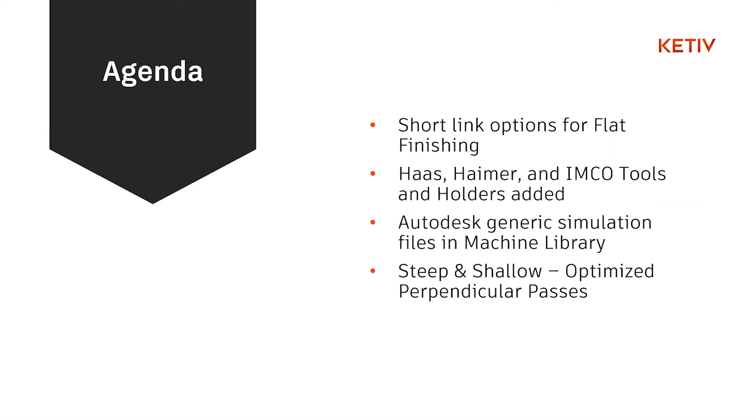Again, it's been optimized. I'll show some of the settings that have been added to that toolpath, so that you guys are aware of how it works. Let's go ahead and jump into that first option.

So we're going to be talking about flat finishing. This toolpath has been incorporated into Fusion 360 since August. It's very similar to the horizontal toolpath, but there are a few differences that bring it up to par. If you guys have been using the horizontal toolpath for some time, one of the biggest issues I've seen happen is...

if you have holes on your parts—let's say you have a flat and then a bore or a through hole—if you use the horizontal toolpath, it's going to pick up that hole and try to machine around it. One way around that is you have to patch that hole up using some sort of surface, but that takes time, especially if you're not used to using the surface command or the surface environment. It can increase your programming time.

The flat finishing toolpath differentiates in that it actually machines over the hole—it ignores that profile and machines as if it was just a smooth flat surface. The other drastic change is that it recognizes open pockets. If you're using the horizontal toolpath, that toolpath doesn't pick up that it's an open pocket—even though it is one, it'll see it as a closed pocket and try to machine starting from the inside, working its way out. Whereas the flat finishing toolpath recognizes that it's an open pocket and starts machining from the outside of the part. Really nice changes.

So let's go ahead and jump into the software and show this. I'll be jumping back and forth between the presentation and the software.

Here we have a part, nothing too crazy—it's a pretty prismatic part, meaning no organic surfaces. If this is your first time inside Fusion 360, this is exactly what you get. I always want to be careful saying that, because in maybe 6 to 8 weeks, things might be a little different, or if you're watching on YouTube, the tool ribbon might have changed a bit. So always keep an eye out for that.

Another thing with Fusion 360 is that you don't really have versions, since it's a cloud-based software. You won't believe how many times customers ask me what version I'm running—we're all on the same version at this point. So keep in mind that everyone using Fusion 360 is essentially on the same version.

So this part, while not really organic, still has a lot of flats and pockets that you can machine. One great strategy I'd take advantage of for this part before flat finishing is the horizontal toolpath, which is a 3D toolpath. One thing to point out is that even though we're not working with an organic surface or part, you can still use 3D toolpaths.

That's one thing that I always like to showcase when we're doing trainings. A lot of people have this misconception that 3D toolpaths are going to be used on surface parts or to do some sort of surfacing. No, you can actually take advantage of the 3D toolpaths to do some pretty prismatic machining.

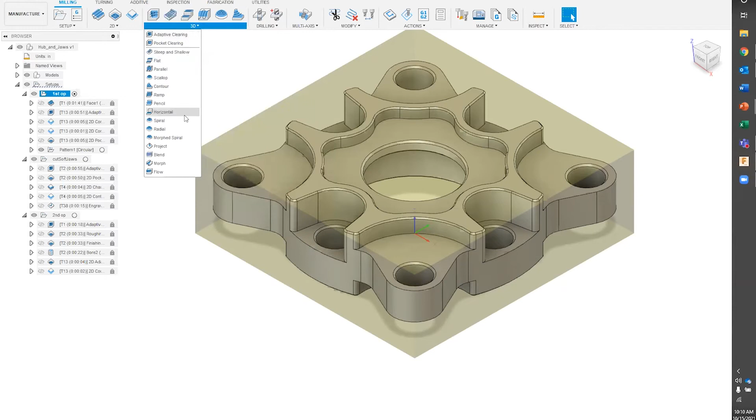So for this one, I'm going to go ahead and select the horizontal toolpath. My previous tool gets selected, right? So nothing has changed here. Everything here is still as I remember it. You still have the 5 tabs there. And I'm not going to change anything inside of this horizontal toolpath. I'm actually just going to leave it as it is, so I'm just going to go ahead and press OK.

And there's the toolpath, right? So it actually does a pretty good job of finding the flats and applying a toolpath. Now it might look a little bit different, and if you guys have been using Fusion 360 for some time now, you're probably wondering, well, where are your lead-ins? Where are the lead links? I don't see any yet.

So again, take advantage of the show hide leads and links option. This does clean your interface up a little bit more. Obviously, before posting out, you probably want to see your links to make sure that you're not crashing into your clamps or maybe some sort of work holding that you have, so I always recommend having that. But as you're trying out some of these toolpaths, sometimes it's nice to just see the cutting passes. What exactly am I going to be cutting? Where is it going to be cutting into? It kind of cleans this up a little bit.

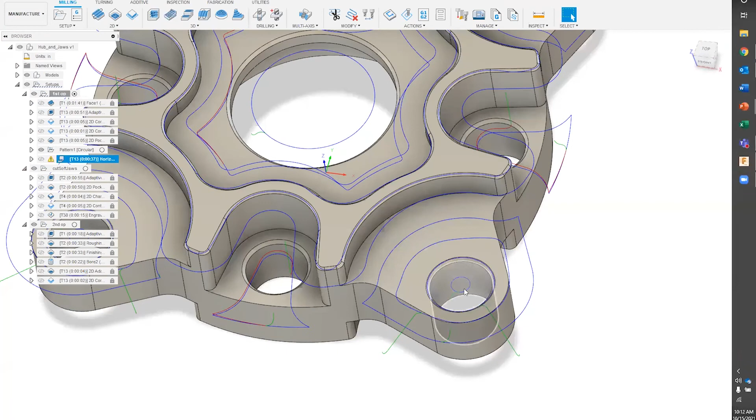But anyways, going back to what I was saying with the horizontal toolpath, you will notice on this specific pocket it picks up that there's a hole here, and it tries to machine around the hole. It does a really nice job of actually finding the contour here and machining to that contour. So obviously that's great, it kind of offsets the passes. But the one thing that I'm not a big fan of is this hole, right? It might give us a kind of weird surface finish. In that case, what you would do is probably go to a 2D pocket or maybe a 2D contour, offset the passes, and get the pass, or the toolpath, that you're really looking for. So that's one of the things that I don't like about this toolpath.

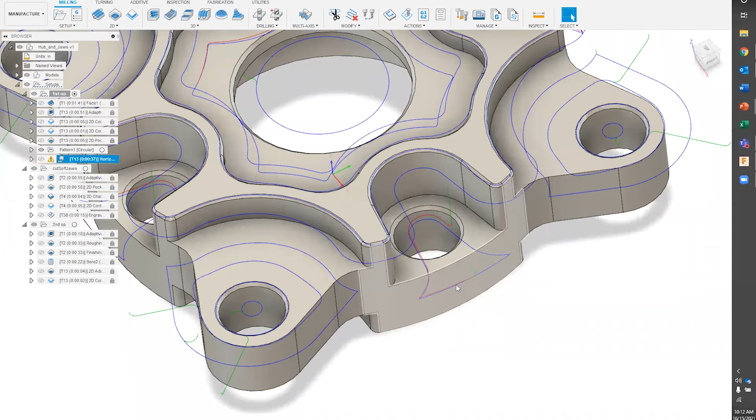The other thing, if you take a look at this pocket now, take a look at where it's starting. It's kind of leading in, or plunging in, ramping in into the center of the pocket, when this whole time it actually can start from the outside and then work its way into the part. So those two things are the big differentiators between the horizontal and the flat toolpath.

So let's go ahead and bring in the flat toolpath. Again, I can go up here to the very top. If I had settings that I made for the horizontal, I would have to make the same settings for the flat. Instead of doing that, always take advantage of the create derived operation. Even as you guys are programming some of your parts and trying to figure out which toolpath is best for some of the geometry that you have, take advantage of this. Make a toolpath, make the changes to that single toolpath, and then try to select another toolpath that you want to test out.

So in this case, I'm going to go ahead and use that flat finishing strategy at the very bottom. A lot of people might try to find it up here at the top, but it's going to be here at the very bottom. Again, not going to make any changes to it, exactly like I did to the horizontal toolpath, and I'm going to go ahead and press OK.

Now here is one thing that I do want to make sure that you guys are aware of. I don't have a stopwatch, but it was a little obvious that the flat toolpath took a little bit longer to generate than the horizontal toolpath, and that's going to be a given. So if you have a larger part, just keep that as a consideration on the back of your mind. The reason for that is that the flat is doing way more calculations.

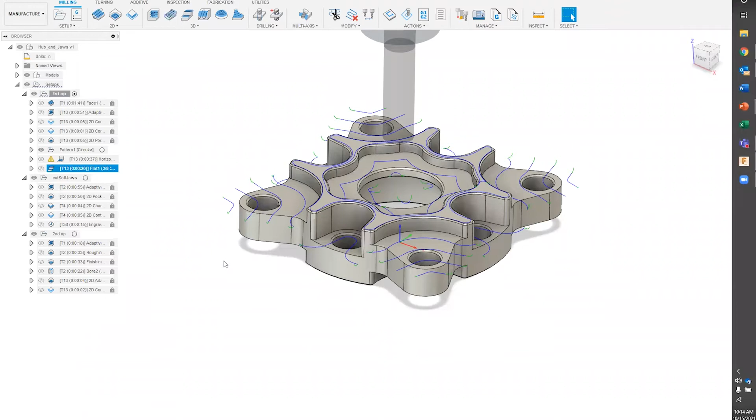So it's actually trying to find the flat surfaces, but apart from that, it's trying to see, does that flat surface have a hole? And then can I machine just a smooth profile over that hole? Is this pocket an open pocket? If it is, can I go ahead and start from the outside of it?

So it has more functionality, and therefore it is going to take a little bit longer to calculate. That's one thing I want to make sure you guys are aware of.

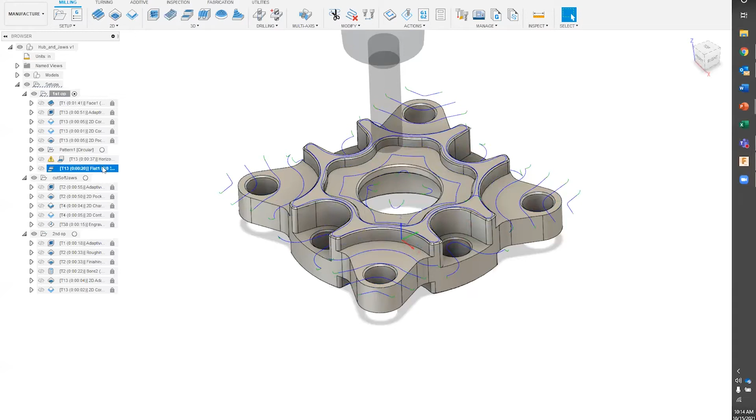But anyways, taking a look at the difference between the two, you can already see a huge improvement. Obviously, we can probably delete this pass, or trim this pass. Maybe we can change the stepover here to get a closer pass to the surface. But nonetheless, right off the bat, without changing any settings, we get a really nice finishing toolpath for some of these open pockets, and even the closed pockets up here at the top.

So again, definitely take advantage of that flat toolpath. To my understanding, it's not something that's in preview, so everyone should have access to that.

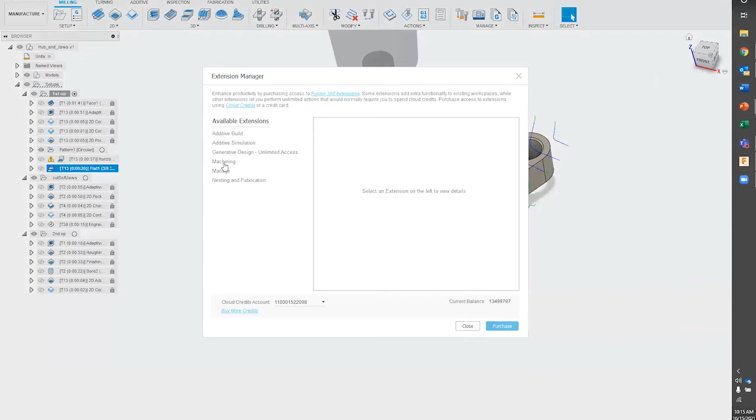You don't need to pay for it. I can double check on that, but taking a look at some of the extensions here in machining, you're not going to see anything on the flat toolpath, unless I missed it. The only one I know for a fact that's part of the extension is going to be that steep and shallow strategy.

So again, this is accessible to everyone. If you guys are using Fusion 360 and are constantly using the horizontal toolpath, go ahead and give the flat toolpath a go there.

So let's go back to the PowerPoint here. Again, improved toolpath efficiency, short link options. So that's actually the update that the flat toolpath got. I was just talking about the flat toolpath.

So the update that this flat toolpath got: if you go to the linking tab, safe distance, maximum stay down distance. This is something that not a lot of customers are really playing too much with, but essentially, if your tool has a lot of retracts,

and maybe it's a pocket, maybe it's a pretty large part, and you know that it doesn't have to retract, or doesn't have to retract all the way up, and it's going to be safe, you can change the safe distance, and you can change the maximum stay down distance.

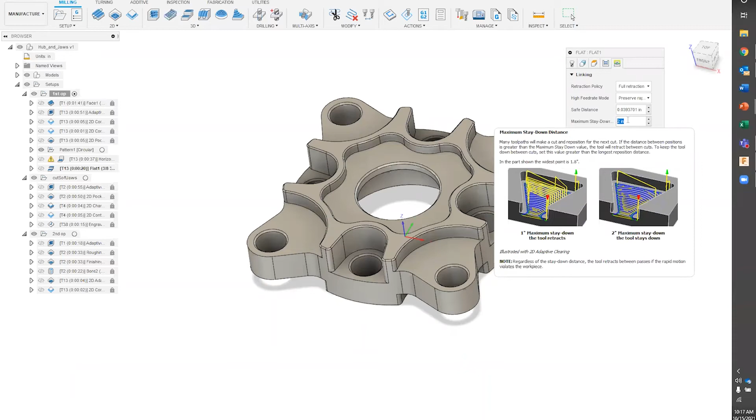A common question I get is, how do I know how large to make that maximum stay down distance? I typically go 2-3 times bigger than the size of the part. So if I have a part that's maybe 5 or 6 inches, I'll go 18 inches as a maximum stay down distance. What that allows the tool to do is, granted, it is going to bump up the calculation time a little bit, but it's going to try to force it to stay down instead of retracting all the way up.

Now, word of caution: when you make that change, you do have to be careful with any sort of fixtures, clamps, or work holding that you have on your part. Because if you don't have them modeled, it's going to have that pretty low retract, and you do run the risk of possibly hitting that clamp, fixture, or work holding. So just be careful with that.

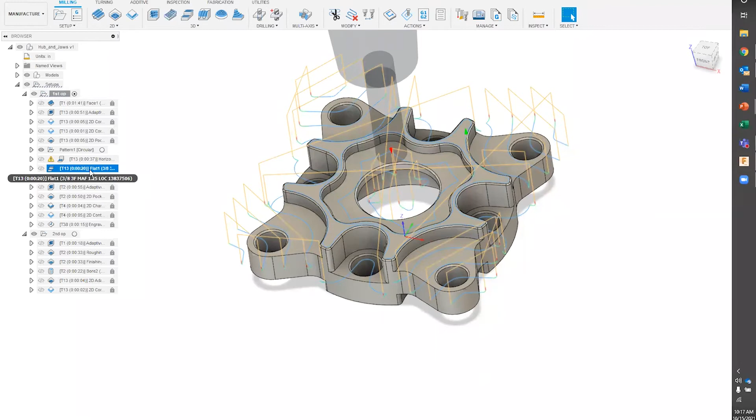And that's where I would recommend turning on your links, so you can see exactly where your tool is going to be going, and then see if you have any possible collisions in there. So that's the update that they made to the flat finishing toolpath. Flat finishing isn't a new toolpath, it came out in August, but the update they made is adding the ability for the safe distance and maximum stay down distance.

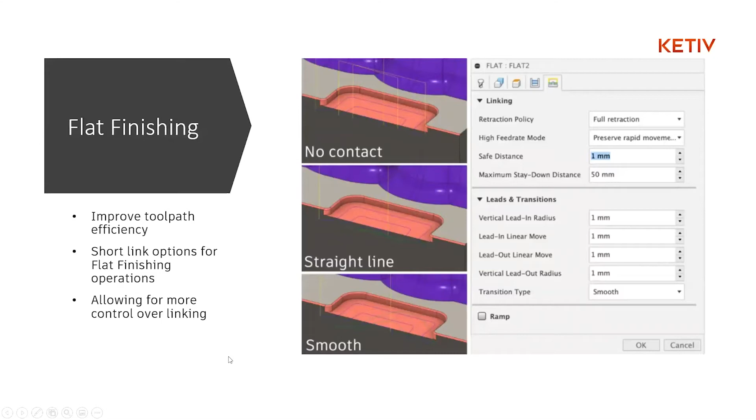So the next update that they made - the tool, they actually made some additions to the tool library and the machine library as well.

So let's go ahead and take a look at this. Again, a lot of people don't take advantage of this, and I can kind of see why. One of the customers was actually sharing with me the reason why they don't like doing this, so let me go ahead and show you why.

So I'm going to go into that library and bring it up here for you guys. If you've ever had to update a post, or look for a post, chances are you're familiar with this website, right?

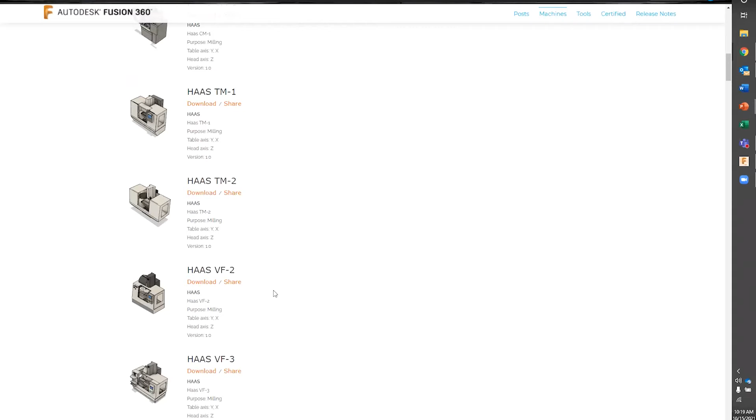For those of you that aren't familiar, this is the website that Autodesk has. It's an open source website, meaning everything in here is free for you guys. So you can go ahead and find a post, download it, and better yet, go to the machines tab, find a machine, and download it. So you have all of these different machines available to you.

For those of you that aren't aware, machine simulation has been out for some time now, but it is still in preview mode. That's one thing I always caution people about: if something is in preview mode, you have to pay a little more attention to the work you're doing, because it's not fully tested and hasn't been completely released yet by Autodesk. So always have your senses a little more heightened when working with preview features.

But I have been testing it these last couple of weeks that I've been back, and it's been working great so far. There are a few things, like I said in the beginning, that you do have to set up before you get machine simulation to work. So let me go through this, and then we'll show you the machine simulation.

Autodesk has been working hard updating this library. If you don't see a library here, you can possibly reach out to them, or you can create your own. There are ways to create your own machine simulation file as well. If you guys need help with that, we can help out, and I'll share my contact info at the end of the webinar. But chances are your machine, or a very similar version, is going to be found inside this list.

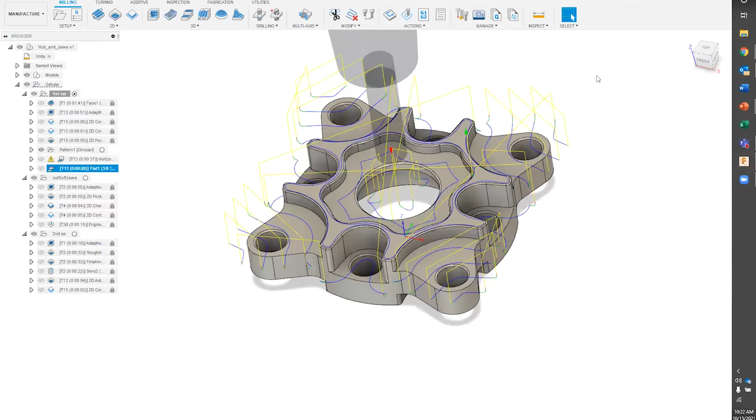Right, and in the manufacturing tab, or the manufacturing environment, under the manage panel, you do have that tool library option. Notice that it's up here at the very top. So again, if you don't see it at the very top and you do want to see it, you do have the option of bringing it up to that toolbar.

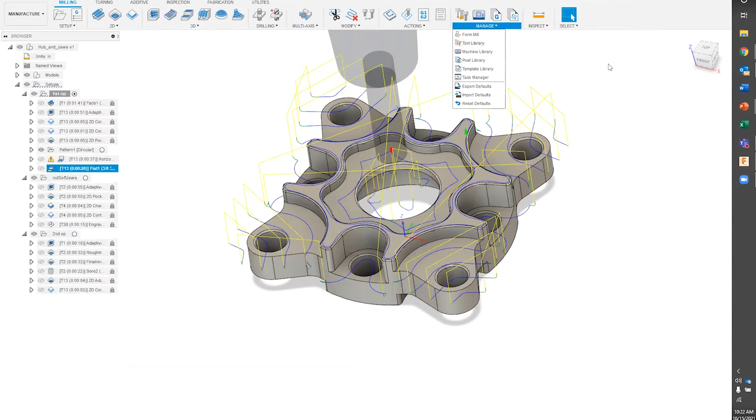Right, so I'm going to go ahead and click on the tool library. This is where obviously your entire tools are going to be residing. So you have the document tools. I'm not going to go into this too deeply because we do have other webinars that kind of cover this. But you have your documents tool, you have your cloud tool library, which I 100% always recommend you have this turned on. And then you have your local tool library.

What I recommend, and this is again, if you guys only have a handful of tools, what I recommend is having that tool library inside of your local tool library. So the one that we just downloaded, finding the tools that you want, and then just adding them to your cloud tool library. Now, a common question I get is, well, why would we do that? It's really just up to you guys. If you find yourselves maybe using different tools from the IMCO tool library, or whatever tool library you have, then go ahead and add them to the cloud tool library. That way you guys just kind of avoid cluttering this up.

Reason why I bring this up is because, again, I like to keep this as clean as possible. So if I'm working with a customer and I'm setting up their tool library, I always like to keep it organized. So based off of machines, maybe based off of different material types that they're going to be cutting, whatever the case may be, just keep that cloud section of the library organized as much as possible. So if you have that IMCO tool library, it can cause confusion. It's just kind of ruins the flow of the cloud section. Some people might see it like that, some people might not. Again, completely up to you guys.

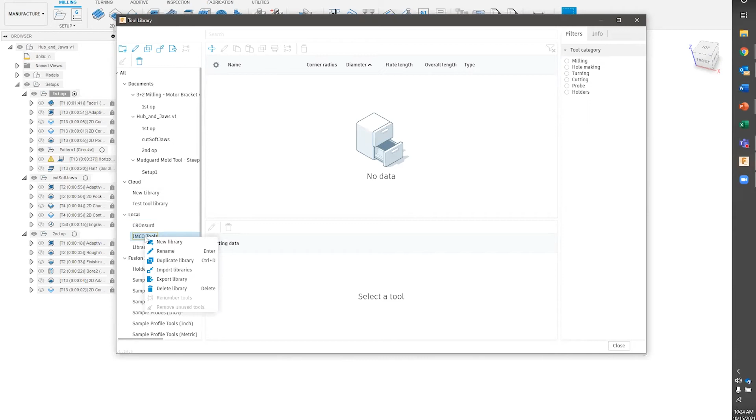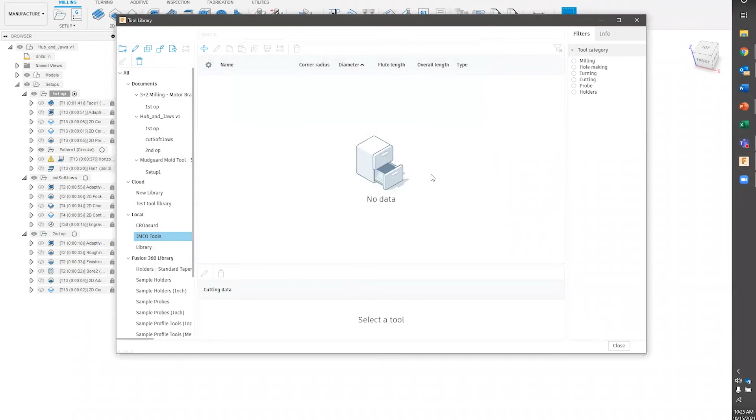But what I sometimes recommend: go into your local tool library, say new library. I'm going to go ahead and call this IMCO tools. And again, we just downloaded that tool library, so I'm going to go ahead and say, go ahead and import libraries. And again, what we're doing there is we're right-clicking on that local tool library and saying import libraries. We're going to go navigate over to our downloads, find that IMCO, say open. And just like that, we have the entire library selected.

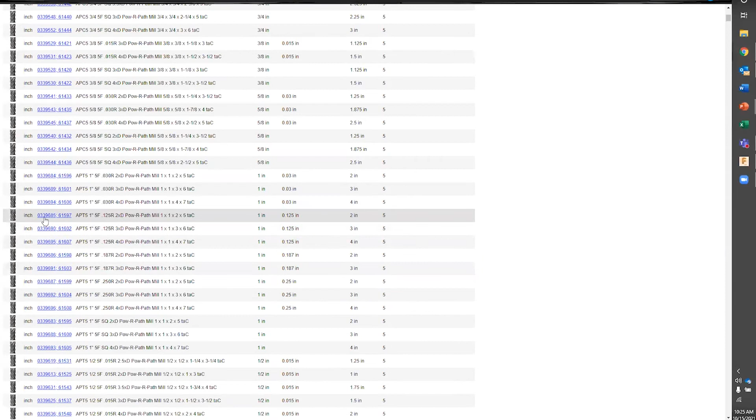Now, here comes the kind of interesting point. So again, you only need 2 or 3 tools. What you can do is you can actually find based off of product ID. So if I go in here into the Imperials and I say view, let me see if I can do this relatively quickly. I'm going to go ahead and see if I can find, let's go ahead and see if we can find this one. So I saw 2 IDs there, might not be the case. Let me do this one. There it is. So it was just that first ID that I needed.

So as long as you know the product ID, if you know maybe the description of it, obviously if you know the tool dimensions, that also helps as well. But if you know the product ID, which chances are, typically you have a list of different IDs, or maybe the different tools with the product ID, you can go ahead and just insert it here. Now what you can do is you can right click, copy tool, and then bring it into your tool library.

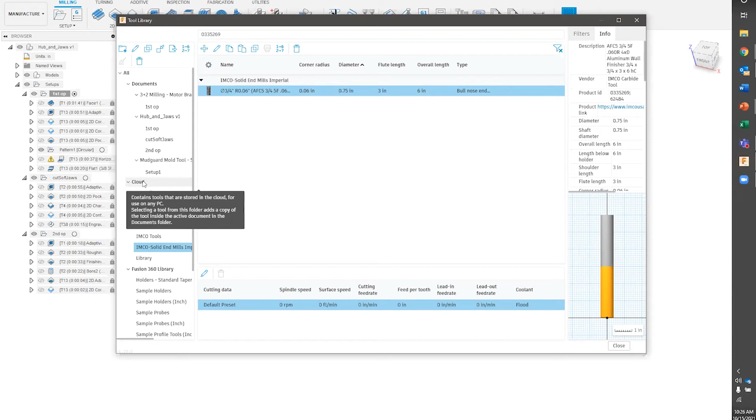Now, again, some people don't have cloud tool libraries. I highly recommend you change that. So why are cloud tool libraries important? If you're working with, let's say you're working at work, for whatever reason, you need to maybe sign into your home computer, you can go ahead and do that. So you're going to have access to all of those tool libraries.

Now, if it was local, this local tool library only lives on my laptop. So that means if I sign in at work and I'm at a desktop at work, I'm not going to have access to any one of these libraries, because these are local to my computer. Now, I can't remember off the top of my head. I thought I read somewhere that this cloud tool library gets enabled by default.

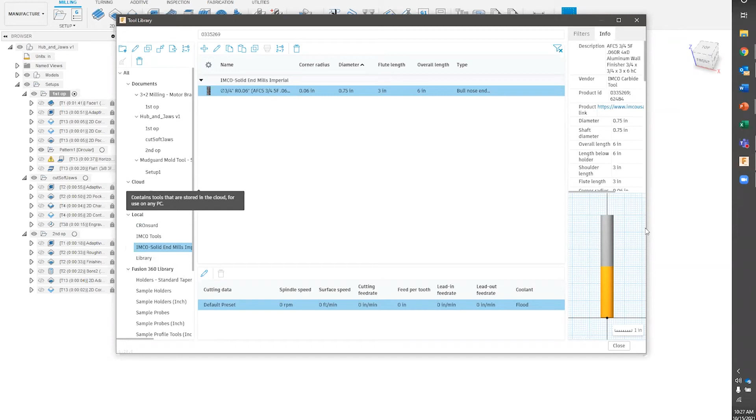I used to know that there was a setting here. So if I go into my preferences, manufacture, enable cloud libraries. So again, I don't know if this gets checked on by default. I know in the past it was something that the user had to check on, but now you have the option to check this on.

So again, if you don't have this checked on, if you don't have cloud libraries, or if you don't see cloud on your tool library, chances are you just don't have this enabled. And this is how you get those out. All right, so that was a quick little spiel on the tool libraries.

Again, they've updated the list. Take a look, it wasn't just tools that they modified, they actually also changed the holders. So they've updated Haas tooling, Haas holders. So this looks like it was one of the ones that they updated. Different tool holders that you can now go ahead and select from.

Really neat functionality. Again, instead of doing it manually or spending maybe an hour, 30 minutes trying to do your holder, just go into the cam.autodesk.com website and see if that holder is available for you guys.

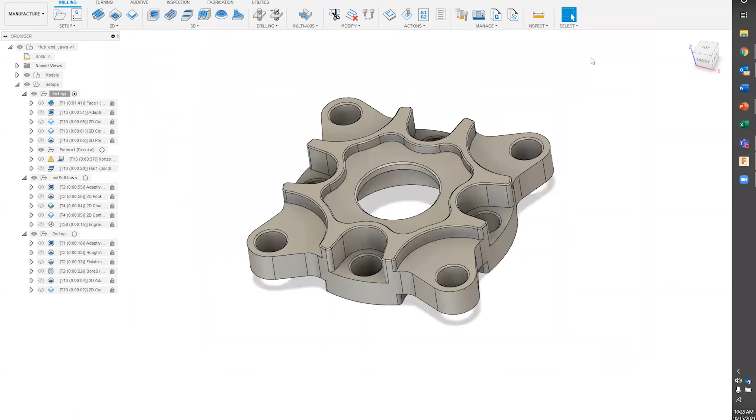All right, so machines. We kind of briefly talked about machines, kind of where they're located. So let's go ahead and show you guys, and I think probably in the future I'll do a full-on presentation or webinar on how do you work with these machine simulations.

So the first thing that I want to go ahead and point out, we have this part open. This part already has toolpaths enabled. I'm going to go ahead and activate that first setup or that first operation.

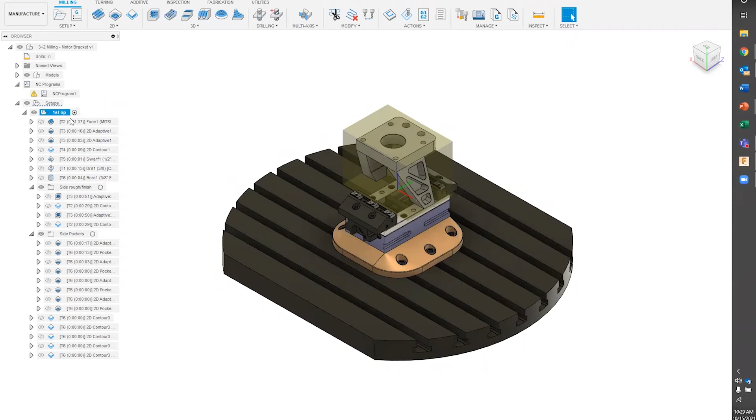Okay, so how do we add the machine simulation files? Now this is an option that everyone should have seen probably for the last year and a half, maybe even 2 years. I know I've seen this option every single time I bring up the setup dialog box. I'm going to right click here, say edit.

And so again, I right clicked on the setup. This very first section is where you start kind of defining the machine configuration and then the machine setup. So again, if you guys have been watching my webinars for a while, I did mention, and I would always mention, that this little section was kind of a way for Autodesk to have the machine simulation capabilities. So this was their first step in kind of setting the path for machine simulation.

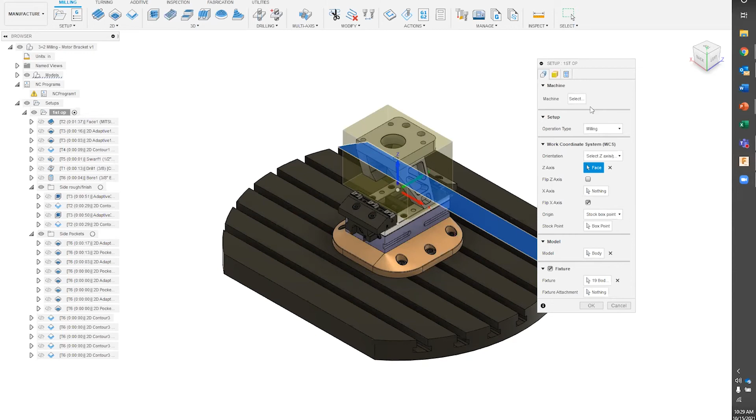So the first step that you would have to do in order to get that machine in is you're going to go ahead and say select, and then you're going to go ahead and look through the Fusion 360 library. So you have recents. If you have a machine inside of this document, you're going to see it in the documents. So very similar to the way that the tool library kind of handles the tools is the way that you're going to see the machines inside of the machine library here.

So I'm going to go into document, my machines. If you have cloud machines, local machines, so on and so forth, you're going to see them here. But if you want to see a list of all the machines, this is where you're going to go ahead and select.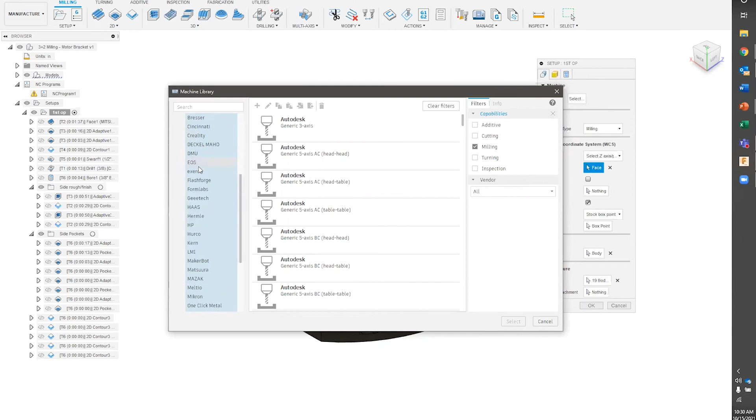So I'm going to go into the Haas. I think this NC program is set up for a UMC 750. So I'm going to go ahead and kind of scroll down, and there's that UMC 750.

Now you will get a little warning sign. So maybe you have a UMC 750, maybe it has different kinematics, you made different changes to it, whatever the case may be. You can only modify machines in your My Machines folder. So in order to do that, you would have to copy this machine and then bring it over to either your cloud library or your local library. You can't modify machines that are inside of this out of the box Fusion 360 library.

So just a word of caution there. Again, if your machine kinematics, if you take a look at this UMC 750, you can see that maybe the axis, maybe the table is different, which might be an option. Maybe the axis limits are a little bit different on my UMC 750. We have additional work holding, we have maybe a different station kind of on the left side. So we changed the limit of the machine. That's where you can go ahead and make a copy of it and then start updating the machine configuration.

Now, what you're seeing here is strictly just machine configurations. You're not going to get a machine simulation out of this. How do I know? If you don't see a little icon on the right-hand side, that means you don't have machine simulation capabilities. This is where a lot of people get confused because they'll go into the machine library, select the machine, and they don't see any options to turn on machine simulation.

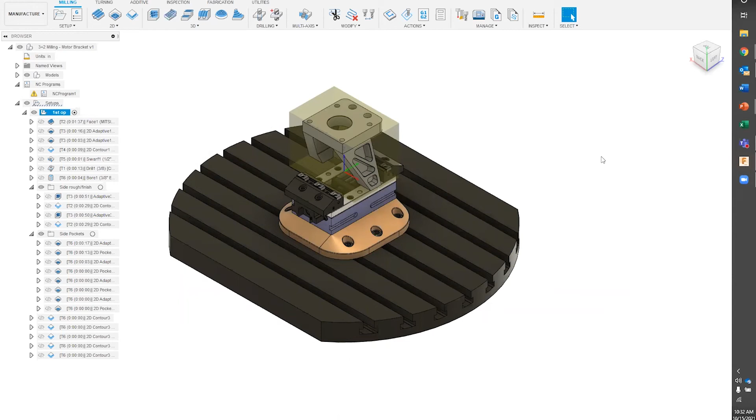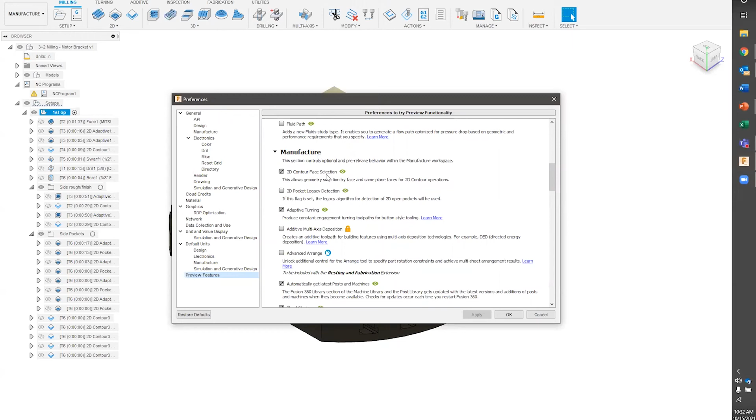The first thing you have to do is go into your preferences, go into preview features, manufacture. This should give you guys an idea - and I don't want to put words in Autodesk's mouth, but in my eyes, take a look at how much preview functionality manufacture has. You can scroll down quite a bit, and all of these checkboxes are things that customers can preview for free inside of Fusion 360. So that should tell you something of where Autodesk is heading with Fusion 360.

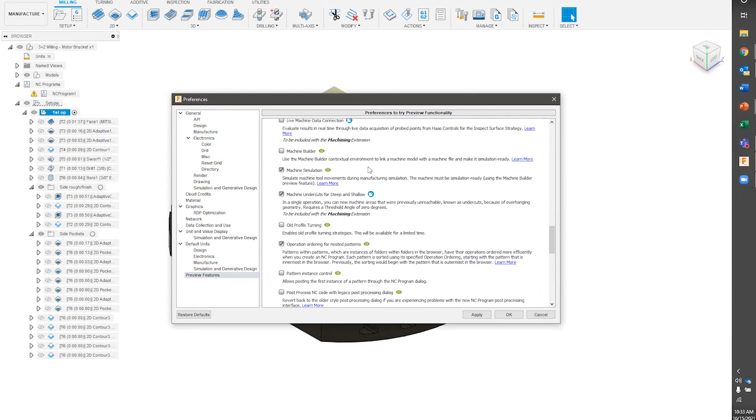The one I'm looking for is machine simulation. It's preview functionality - how do I know it's preview? It's got this little green icon. If it was an extension, something you have to pay for, you'll see a little blue icon instead. So even though it's in preview, you still need to have the machining extension enabled for this functionality to work. Not everything in here is a free preview - some of these are paid.

So machine simulation, machine builder - which to be honest I haven't explored as much yet, so that's something I'll probably give you guys more content on in the future. If maybe you don't see your machine or you want to build your own machine, this might be something to take a look at. But machine simulation is what we're looking for - we're going to apply it, say okay.

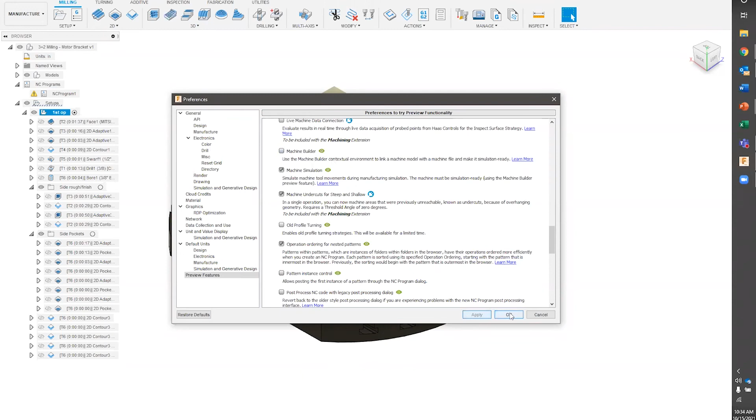Let's go back to that setup. Go into the machine section once again, and now you should see these little icons show up on the right-hand side. What we're looking for is the UMC 750, and now we can see this machine configuration has a machine simulation file or simulation model available.

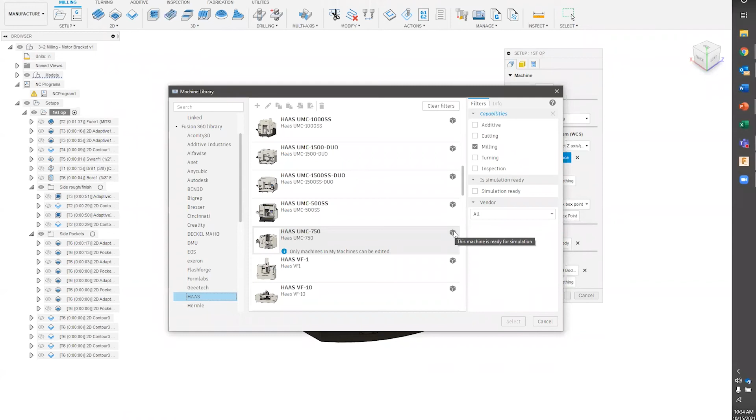I'm going to go ahead and select that one. You can see all the settings here, get a nice little preview of what the machine looks like. I'm going to say select. The model for this machine must be downloaded before it can be used - that's completely fine, I'm going to download the model.

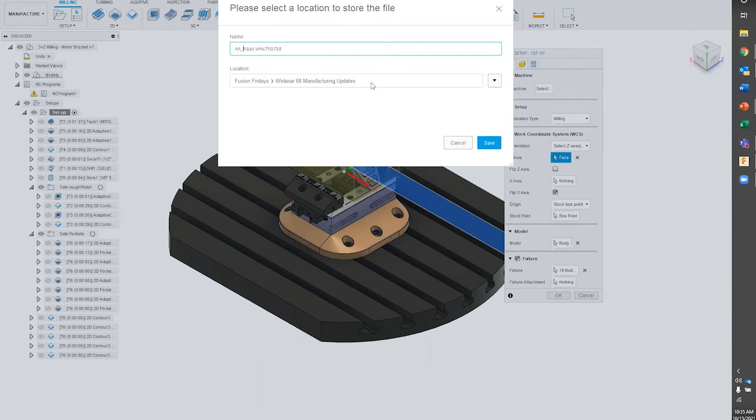It's going to ask you where you want to store this model. I'm going to change it - I think I have one in here already called that, so I'm going to put in AA. This is where it's up to you: do you want to be more careful about where you're storing and downloading your models? Maybe you have a project that's machine specific, so if you're worried about that, set up your project that way. If not, you can just save it with the actual part. I'm going to say save.

You do have to give it a little bit of time to load. This is going to be a little intensive on your laptop or workstation, but you do have to give it a little bit of time.

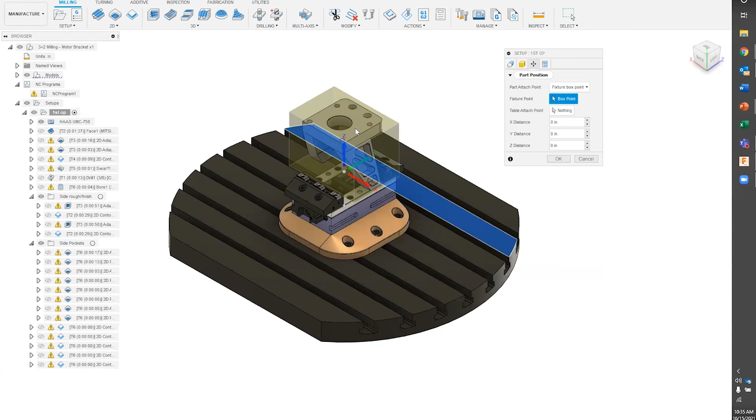One thing I want to point out is that you now get an additional tab - this part position tab. If you don't see this tab when you loaded the machine, something went wrong. You should see this part position tab available, and now you can select where that part is going to be located.

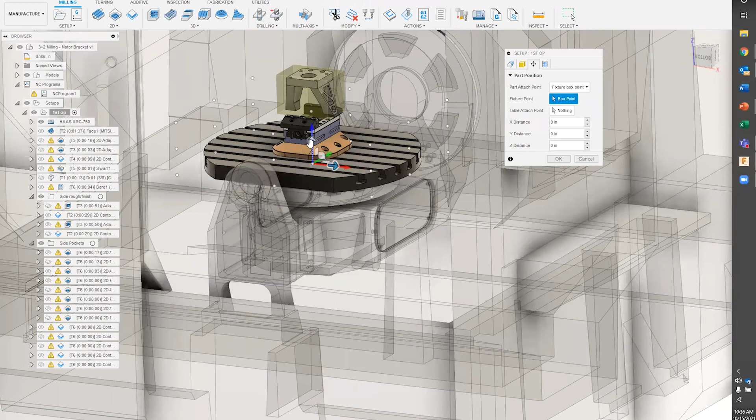Luckily they set up their work coordinate system exactly to where the actual vise meets the table, so I don't need to make any changes here. But you can set where your fixture point is and where the table attach point is - if you want to connect both points, make them coincident, that's one quick way. Or you can just position them with these triads. For me, I'm going to say okay to that.

And there's a machine - there's my part inside of the machine. Now if I wanted to simulate that, let's do some 5-axis or positional toolpaths. I'll do the adaptive and the contour toolpath. Let's simulate just to show you guys what that looks like.

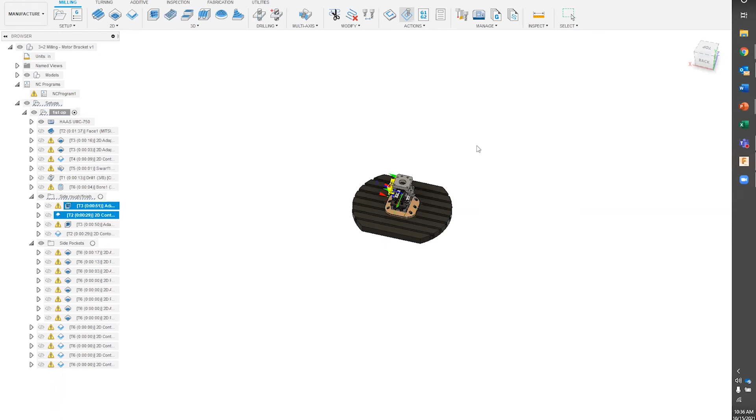Bring it down a bit.

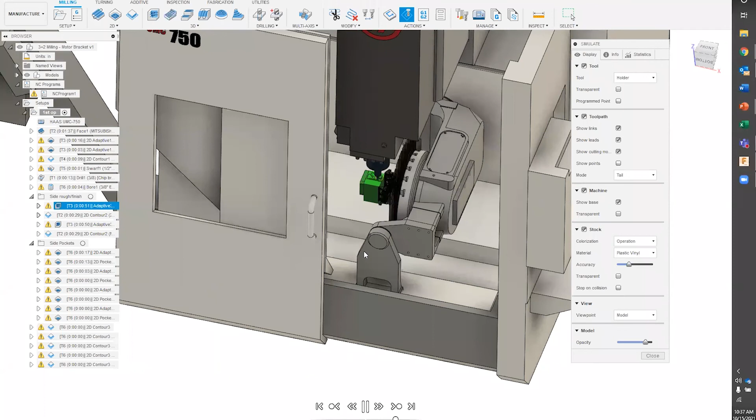Right, and there's a simulation. So again, full-on machine simulation. This is one of the things that helps out programmers a ton, because it always helps to see exactly how your machine is going to be moving as you're machining some of these parts. So that finished. Same exact simulation dialog box - you have info, it'll tell you if you have any collisions, statistics, and it'll tell you the machining time for the operations you've simulated. So there we are, really neat functionality.

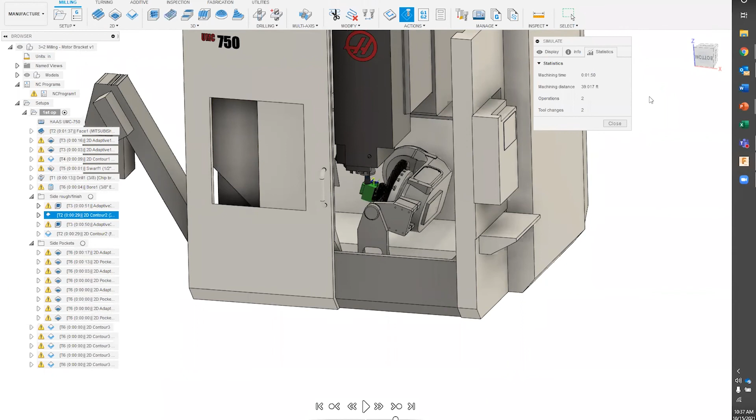This is something that, to my understanding, is free. It is obviously in beta testing, so that's something you guys can check out. Feel free to ask some questions if you have them around that.

Okay, so let's go back to the presentation. Again, we talked about the tools - how do you import tools, how do you import the specific vendor into your library, and then how do you start organizing some of those tool libraries? And then we talked about machine configurations. Autodesk has been adding a lot more machines and machine configurations to the library, so go ahead and give that a look, and start testing it out with some of your models.

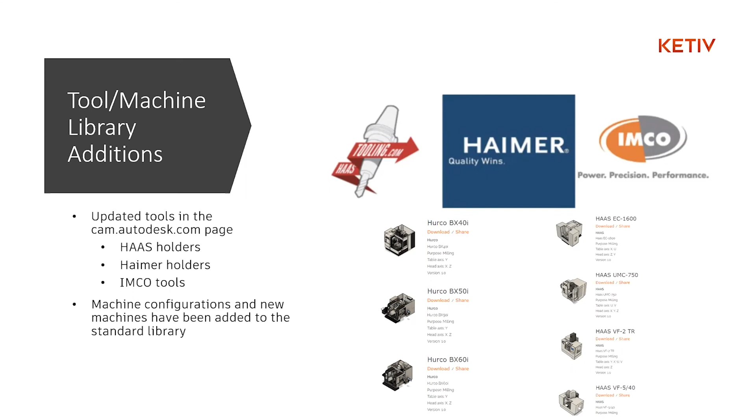All right, and then the last one we're going to talk about here is the steep and shallow toolpath. Now this toolpath is something that is paid for - it's part of an extension, but they've actually made some optimizations to the steep and shallow toolpath. If you're worried about surface finish, if you're working with complicated organic surfaces, chances are you're already using the steep and shallow toolpath, or maybe in the past you've been using a combination of toolpaths to get you something similar.

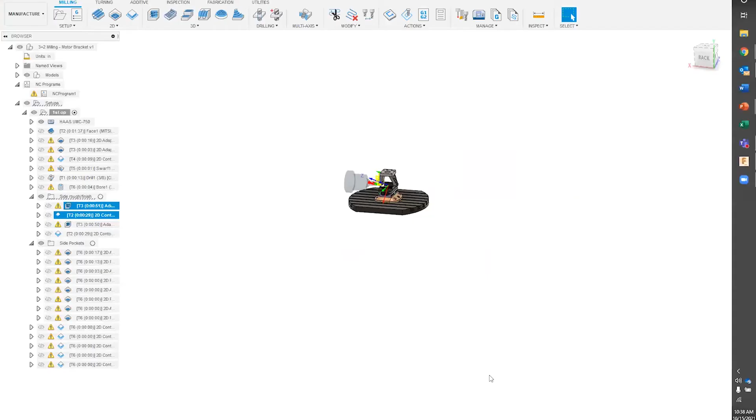Now if I go into the software and take a look at the optimization they did - what Autodesk did with the steep and shallow is they optimized, or now have an option to output the optimized perpendicular passes. I'll kind of explain what that means. You do have to have a few settings inside of the toolpath itself.

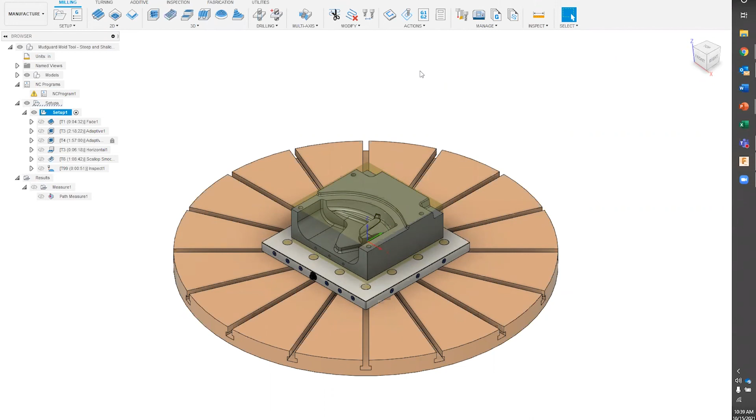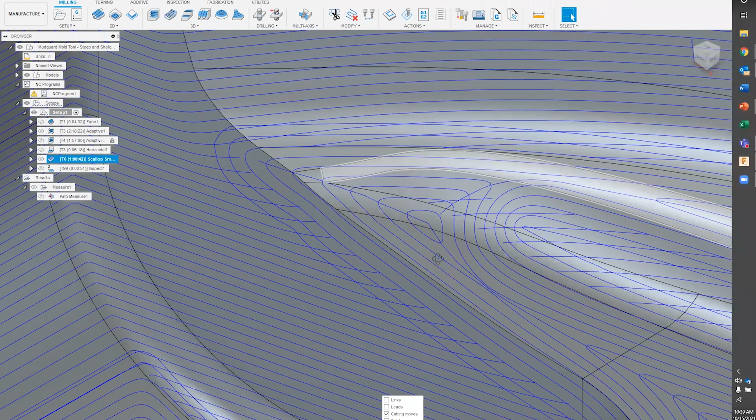So let's go ahead and take a look at the steep and shallow here real quick. I'm going to go ahead and turn off the links, and probably the leads for this one as well. And so here is the steep and shallow - you can see that on some of these shallow areas, it's not really doing a great job. It might leave a little bit of extra material, especially with the cusps - you can see they're not uniform as it's going up. And then on some of the steeper areas, it's doing something very similar.

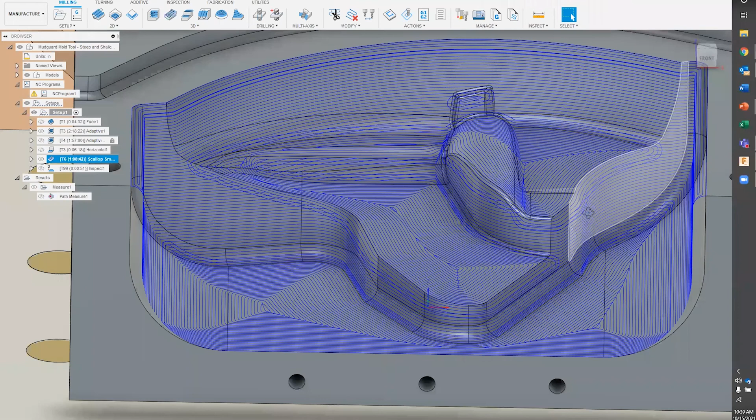So how do we make these changes? How do we address some of the issues we have on these parts? What I'm going to do is make a duplicate of that steep and shallow toolpath - Control D is the hotkey for that. So I'm going to right click on that toolpath and say edit.

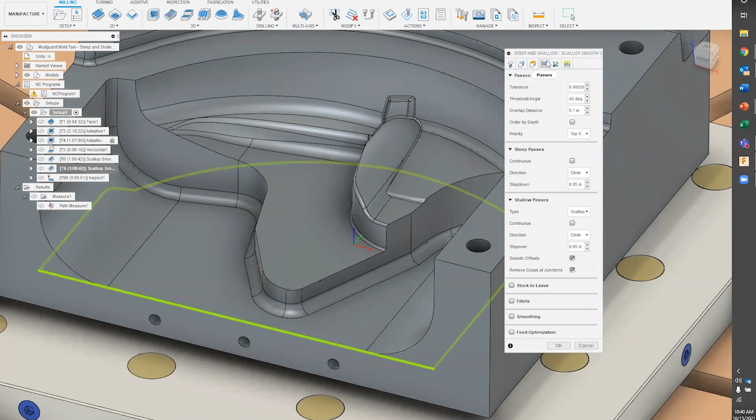By the way, steep and shallow is a 5-axis toolpath, or a multi-axis toolpath. So if you do have a 5-axis machine, you have the option to make this a multi-axis toolpath. But anyways, the new updates we're really concerned with are inside of the passes tab.

So now what the actual steep and shallow toolpath is doing is taking a look at the surface it's going to be machining - is it going to be a steep surface, is it going to be a shallow surface, what's the angle of that surface as the tool goes in to machine it? So a little bit more optimization, more calculations going on in the background.

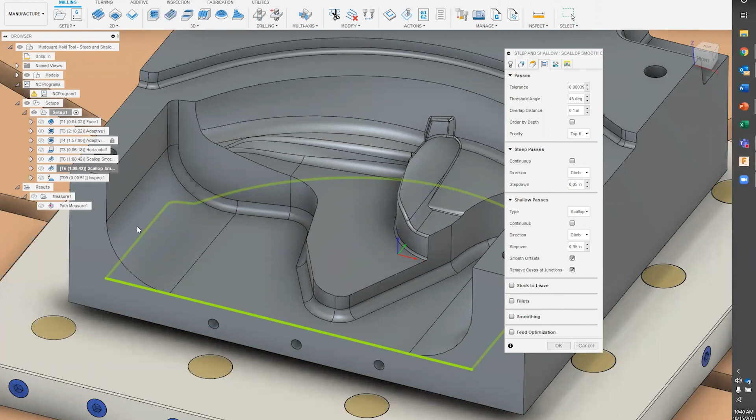Right now, the optimized perpendicular passes should tell you something. It's optimized, right? So that means it's not going to add perpendicular passes to the entire model. It's going to analyze, take a look at the surfaces, and if it needs to add a perpendicular pass, it's going to add it to that specific section. So instead of you trying to break up the toolpath into multiple sections yourself, you can now let the software do that on its own. And that's exactly what I'm going to do, so I'm going to go ahead and turn on optimize perpendicular passes.

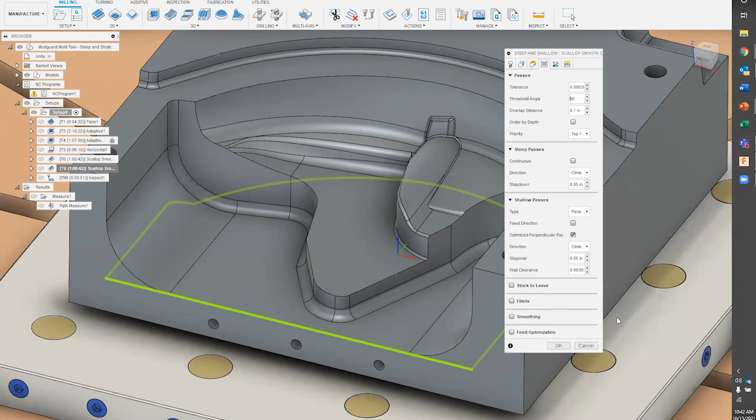The two settings I changed, or technically three: threshold angle, we changed the shallow passes type to parallel, and then we set this to optimized perpendicular passes. We'll go ahead and say okay. Those were the only three changes that I made.

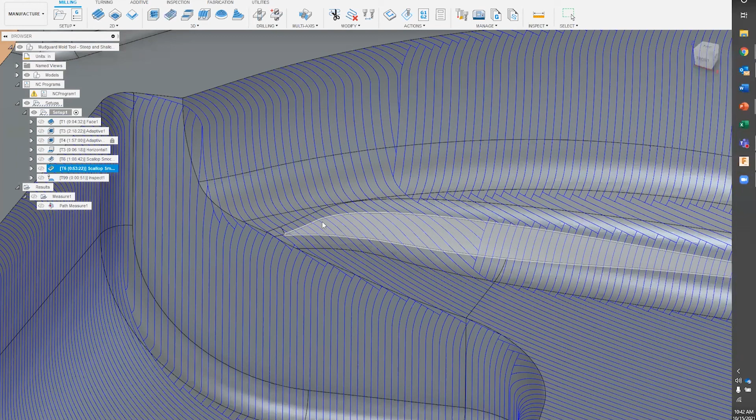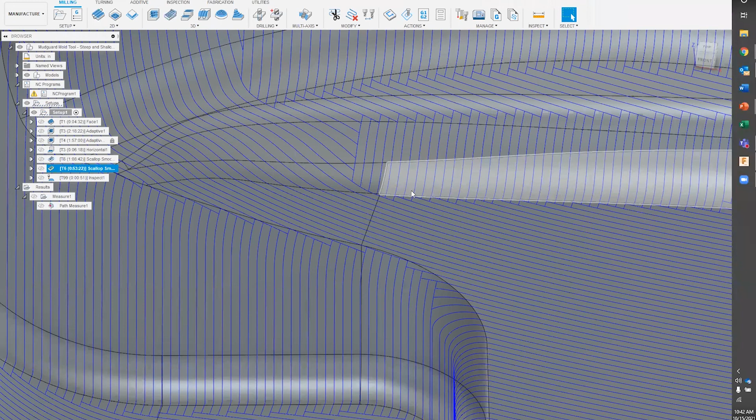If I take a look at the differences now, we can see that we get a much smoother toolpath. Again, it's taking a look at the surface direction, the angle of the surface. This one has some pretty organic surfaces, and it's trying to match the toolpath to the surface it's trying to machine, instead of just applying a scallop toolpath all around the surface. It's really analyzing the surface to see if it can add a perpendicular, and what angle it needs to machine that specific surface in, and then it goes ahead and adds it. So that's the update they made.

Again, this is going to be a paid-for extension, so if you guys need access to something like that, you can access it through the extensions tab.

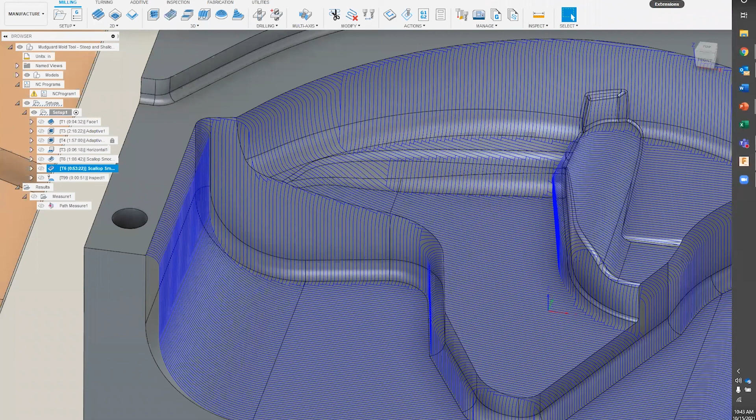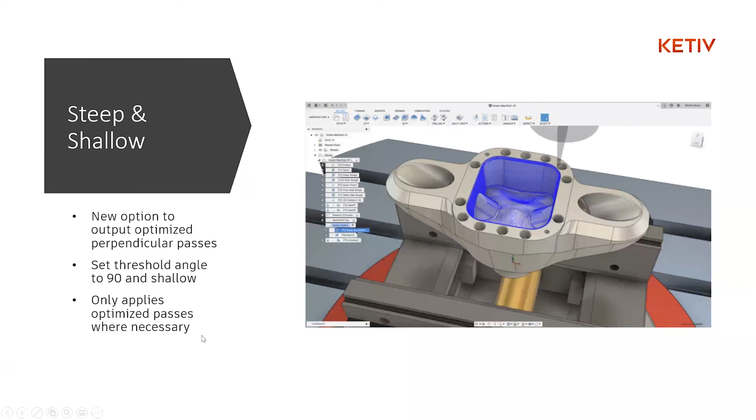Okay, so that's going to be it. Again, tons of new stuff has happened in both August and September, the two months that I was gone, so I'm just getting up to speed on some of the updates, and I'm kind of blown away with how much functionality Autodesk is adding to Fusion 360. So I'm going to go ahead and open it up to questions now. I thought I said 20-25 minutes, and we are way over that now, so I apologize for that.